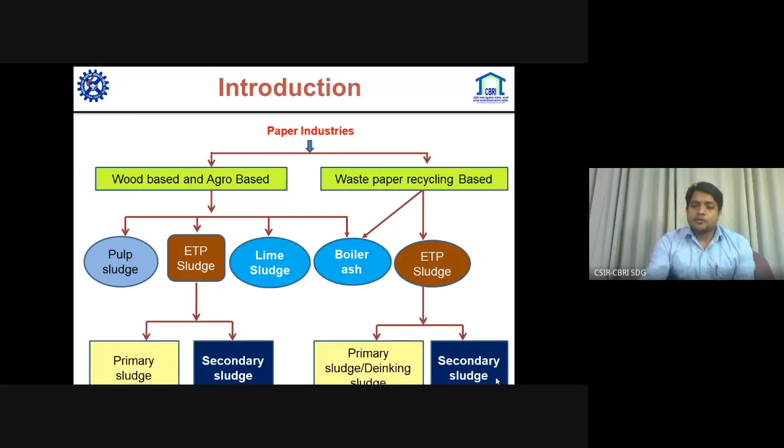Lime sludge generation takes place in wood waste and agro waste paper industries. Basically, in the pulping process, the wood is converted to pulp, and ultimately the pulp is converted to paper. When we use wood or agro waste material in the digester and give it temperature, it will become pulp. And when we wash that pulp, weak black liquor also comes out with the pulp, as depicted in the slide.

Weak black liquor will go to the evaporators. Because weak black liquor is very diluted, the evaporator will convert it into heavy black liquor. This black liquor contains organic lignin, because the pulp must be white, since paper will be white. So the lignin comes out, and this lignin has some calorific value; it is organic, so it is energy.

This heavy black liquor, which has lignin and chemicals used in the digestion process, will come to the recovery boiler. The recovery boiler will consume the lignin and give energy to run the paper plant, and green liquor comes out. This green liquor is nothing but sodium carbonate and sodium sulfide. We can't just waste the chemicals; they are very valuable in the paper industry, in every industry.

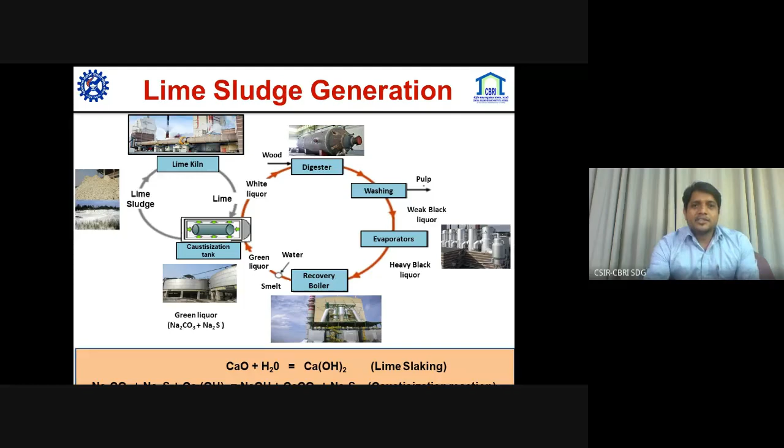So evaporation and heating are okay, but in the calcining process at the third step, this silica causes the scaling problem in the lime kiln. So the process becomes so energy intensive, and hence it's not cost effective to paper industries. So for paper industries it's not worthy to use lime kiln operation at this energy cost.

Another reason is the cheap availability of lime in the market. Lime is very cheap and available in the market, so paper industries are not preferring to regenerate the lime out of lime sludge. They just dump the lime sludge, so it's becoming a problem.

And the third reason associated with lime sludge is the high pressure to reduce CO2 emission, because calcium carbonate will convert to calcium oxide, which will emit CO2, and that is very obvious. Everyone knows the greenhouse effect, and CO2 emissions should be reduced. So there are 3 factors.

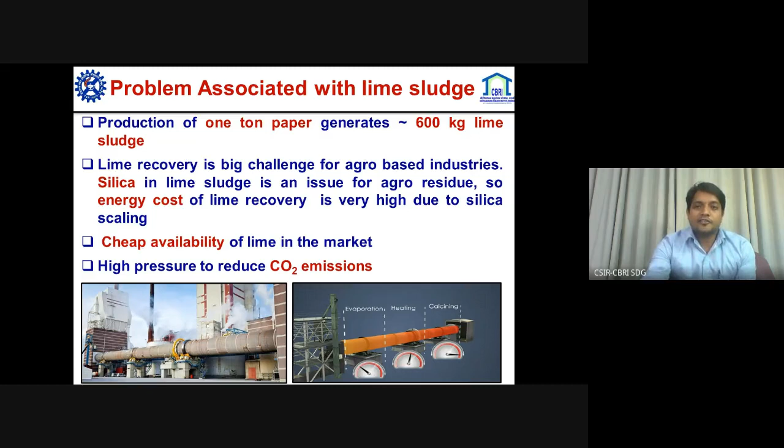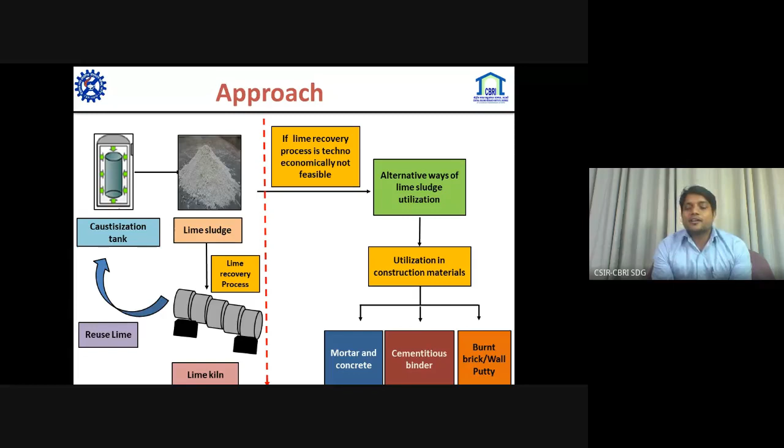What can be our approach for lime sludge utilization in construction? Basically the paper industries were using the lime recovery process, but nowadays the lime recovery process is not techno-economically feasible. So alternative ways for lime sludge utilization should be there. Utilization in construction material can be the option, and we can use the lime sludge in 3 ways: mortar and concrete, cementitious binder, and also burnt brick and some wall putty production.

In this approach, we can use lime sludge in different ways, like blending with other waste materials. We can blend the lime sludge with fly ash and boiler ash because they are sources of alumina and silica. So we can blend this calcium with alumina and silica, which can make a better construction material. Another is calcination, calcium carbonate to calcium oxide, but it is again a very energy intensive process. Third one is we can use it as a filler in concrete.

It is because raw lime sludge is an inactive material. It's calcium carbonate; it will not do anything in the concrete system. So we can use it as a filler. But the utilization of lime sludge as a filler will be very minimal.

We can use the silica of the lime sludge in a fourth way. The silica is present in the form of kaolinite also in lime sludge. So we can convert this kaolinite to metakaolinite, which can function as a pozzolanic material. So there are four approaches.

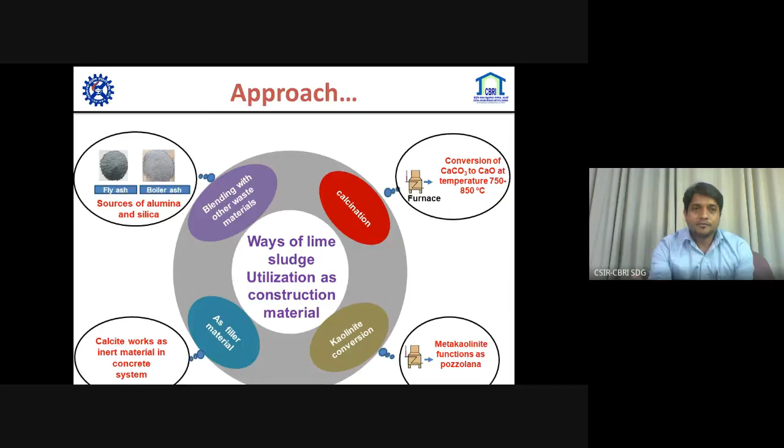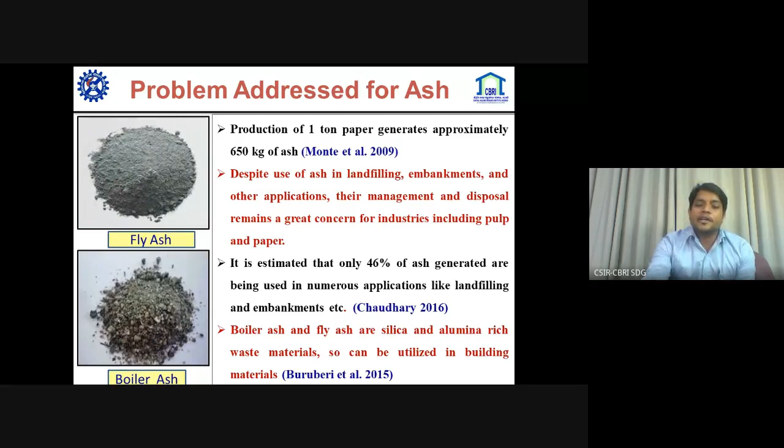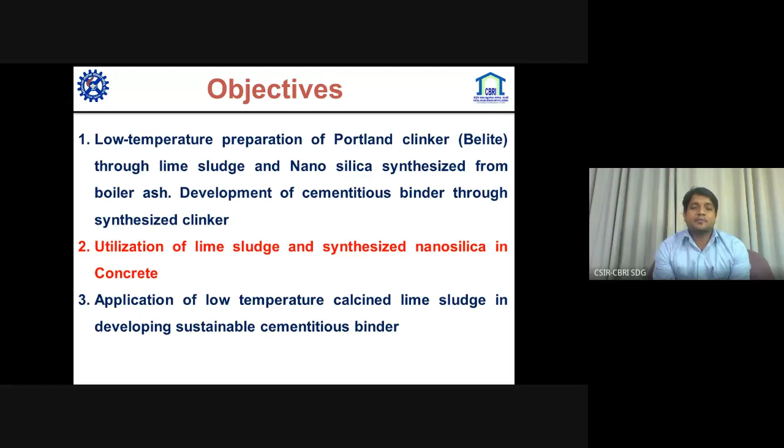The objectives of my work were the low temperature preparation of Portland clinker, basically belite-based clinker, through lime sludge and nanosilica synthesized from boiler ash, and the development of cementitious binder through synthesized clinker. Second one is utilization of lime sludge and synthesized nanosilica in concrete. And third one is application of low temperature calcined lime sludge in developing sustainable cementitious binder.

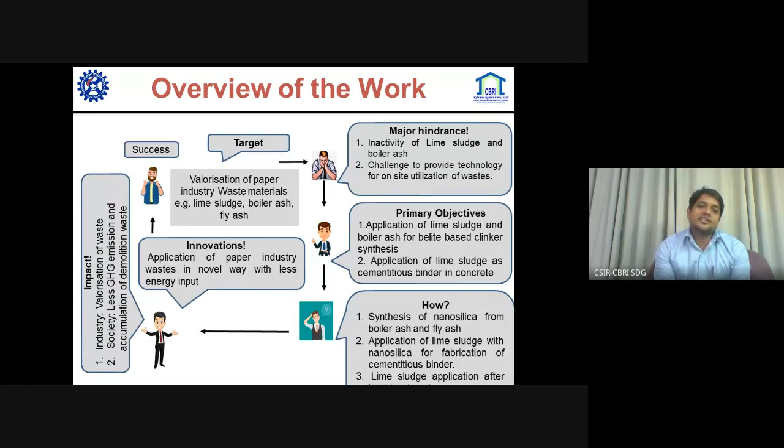The innovation related with this work is the application of paper industry waste in a novel way with less energy input, and it will also impact the industries with the valorization of waste, and society will be impacted with less GHG, greenhouse gas emission, and accumulation of waste.

So the characterization of raw materials: the XRF chemical composition of raw materials was performed, and in lime sludge calcium oxide is present at 45.10%. This is because when it was performed, the LOI is 43.18; carbon dioxide will be emitted, and so the remaining is calcium oxide, 45.10%. If we take them together, it will be around 93 to 94% calcium carbonate.

And in the boiler ash, silica is majorly present with 43.22%, and alumina with 6.18%, and the abundance of alumina and silica makes boiler ash and fly ash good precursors to synthesize nanosilica out of them.

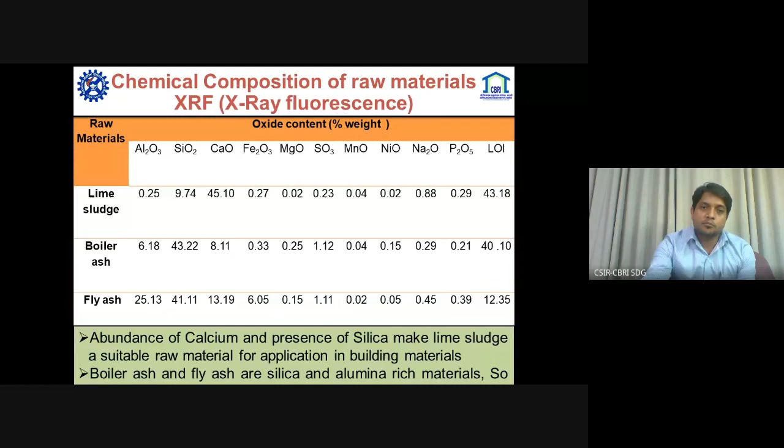On the mineralogical analysis of raw materials, the lime sludge clearly represents calcite, talc, and kaolinite. Fly ash represents quartz and mullite, and boiler ash also quartz and mullite. The fly ash has more mullite than quartz, and the boiler ash has more quartz than mullite. This is due to the greater alumina presence in fly ash in comparison to boiler ash. Boiler ash is more silica prominent, while fly ash has both silica and alumina. So we chose the boiler ash for the nanosilica production. This is the reason.

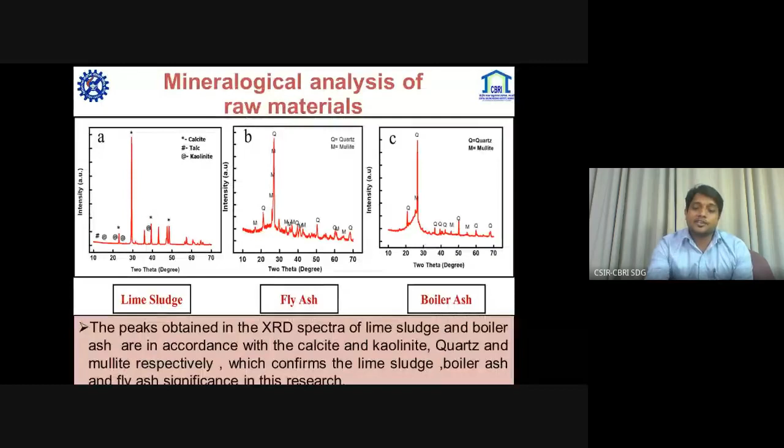So for the lime sludge, at temperature 787 degrees C, the DTA curve is dominated by a strong endothermic peak, which is characteristic of the decomposition reaction of calcite, calcium carbonate to calcium oxide. This is about lime sludge. At 787 degrees C the endothermic peak is there, so this is conversion of calcium carbonate to calcium oxide. It also reflects a mass loss of approximately 40%.

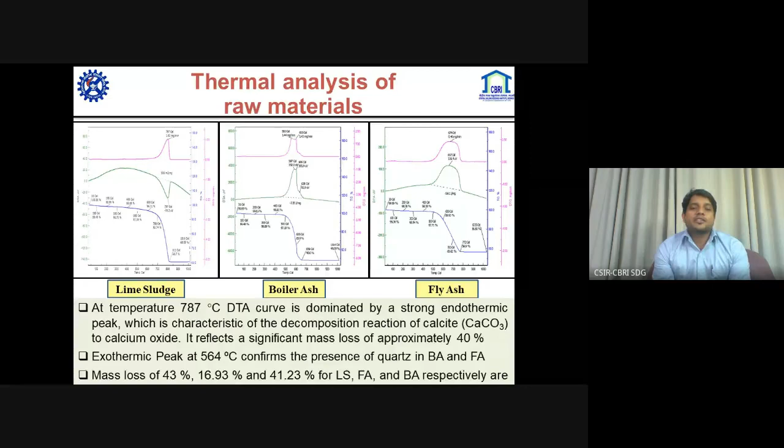The exothermic peak at 564 degrees C confirms the presence of quartz in BA and FA. Mass losses in BA and FA respectively are consistent with the loss on ignition determined in XRF analysis. Synthesis and characterization of nanosilica.

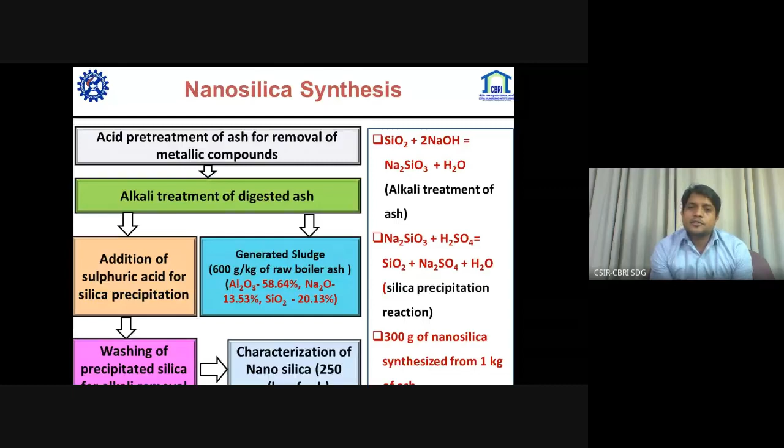Nanosilica synthesis was performed with boiler ash. The acid pretreatment of ash for the removal of metallic compounds was performed. Then the alkali treatment of digested ash was performed, followed by the addition of sulfuric acid for silica precipitation. As you can see in the reactions, SiO2 reacted with sodium hydroxide, converting to sodium silicate and H2O, and this sodium silicate reacts with sulfuric acid, producing silica, sodium sulfate and H2O.

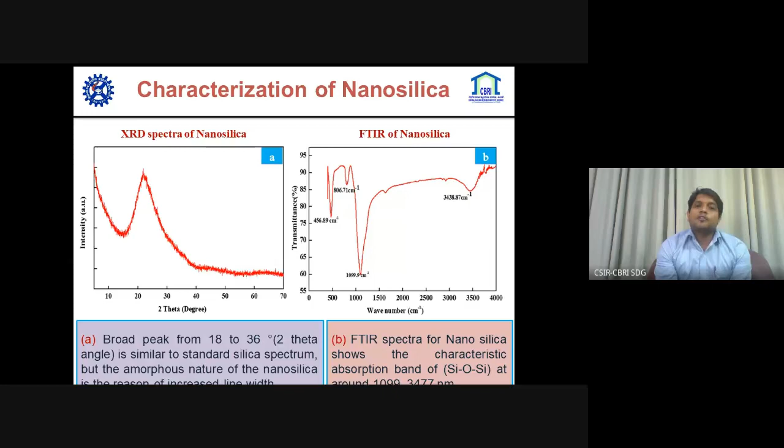In the characterization of this nanosilica, the broad peak in the XRD spectrum from 18 to 36 two theta is similar to the standard silica spectrum, but due to the amorphous nature of the synthesized nanosilica, the width of the peak is increased, as can be seen in the figure. The FTIR spectra of nanosilica show the characteristic absorption bands of Si-O-Si at around 1099 and 3477, which confirm the synthesis of nanosilica from boiler ash.

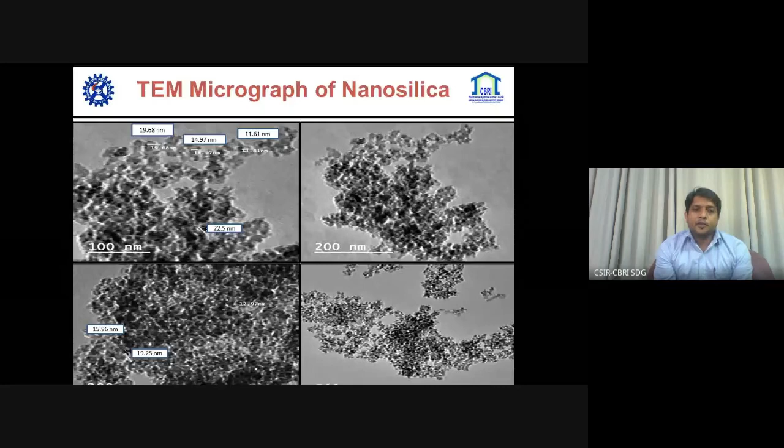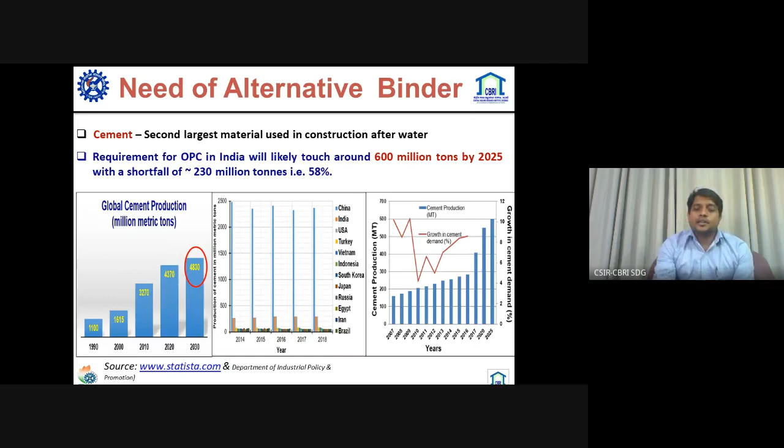Results and discussion: the synthesis of belite-based binder using lime sludge and nanosilica. The synthesized nanosilica was utilized with lime sludge for the synthesis of belite-based binder. Why is there a need for an alternative binder? The requirement of OPC in India will likely touch 600 million tons by 2025, with a shortfall of 230 million tons. It was almost 370 million tons in 2020. So it is required to enhance the OPC production process, or to develop an alternative binder which can help fulfill the needs of the construction sector.

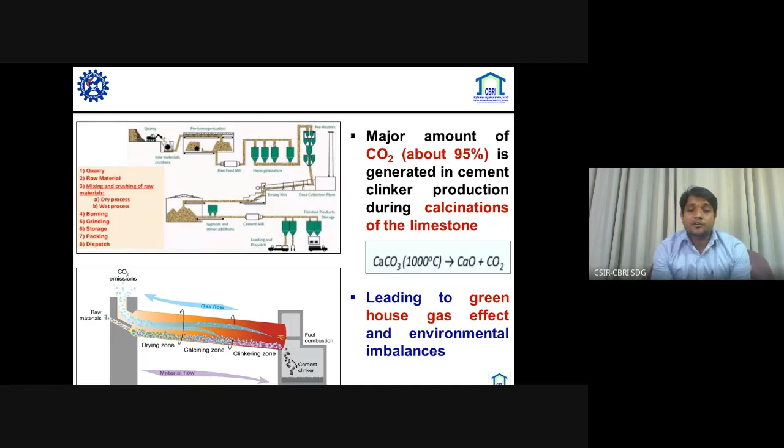But the major amount of CO2, about 95%, is generated in cement clinker production during calcination of limestone, calcium carbonate to calcium oxide, leading to greenhouse gas effect and environmental imbalances.

This binder production will reduce that temperature, and will synthesize the binder clinker at low temperature.

So in this flow chart, it is depicted that lime sludge, boiler ash, and fly ash are used. The boiler ash was used for nanosilica synthesis, and the synthesized nanosilica was further utilized with lime sludge. Boiler ash was also used as a blend with lime sludge, and fly ash was also used with lime sludge.

So when we homogenized the mixture of all three materials with lime sludge and fired them at different temperatures in a muffle furnace, characterization of the mixture for Belite synthesis was performed. From this clinker, the binder was fabricated with the addition of GGBS and tested for different properties.

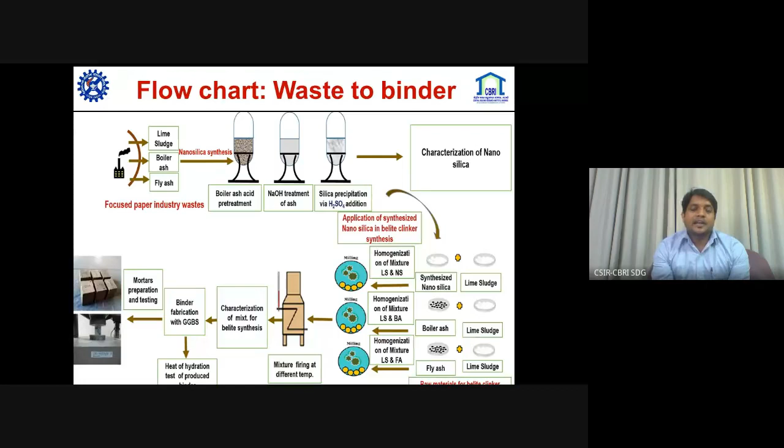As depicted in the flow chart, there were three blends: lime sludge plus nanosilica, lime sludge plus boiler ash, lime sludge plus fly ash. Basically the Belite is synthesized through the calcium oxide and silicon oxide reaction.

Keeping the molar ratio of calcium and silica up to 2, on the basis of stoichiometry, these blends were formed, in which nanosilica was 34 grams, boiler ash was taken up to 78 grams, and fly ash 85 grams.

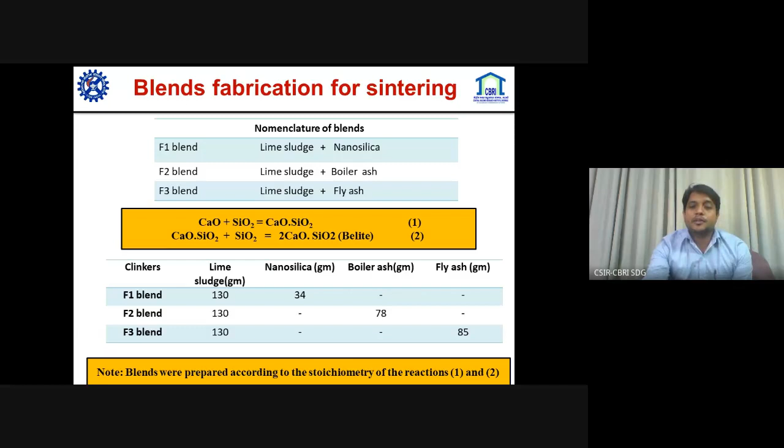Regarding the retention period and heating profile of the blends, pellets were formed with the homogenized blends and sintered in a muffle furnace. Blends were sintered at different temperatures from 900 to 1200 degrees C. A retention time of 2 hours was optimized for all the blends, and natural cooling was applied for all sintered blends.

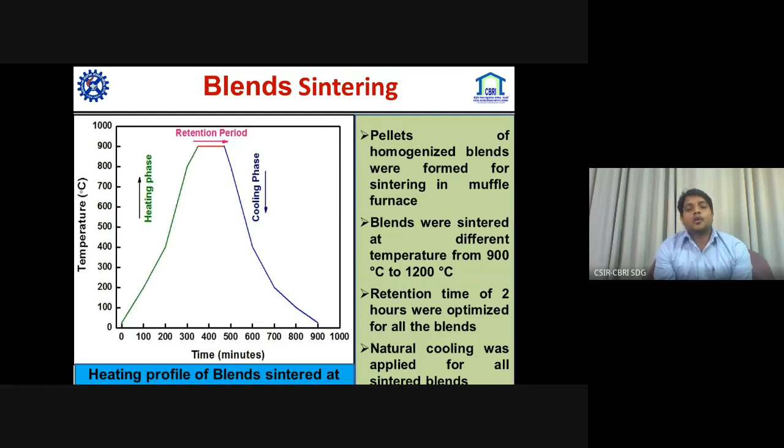After that, the characterization of sintered blends was performed with XRD analysis, hydration test, and compressive strength test.

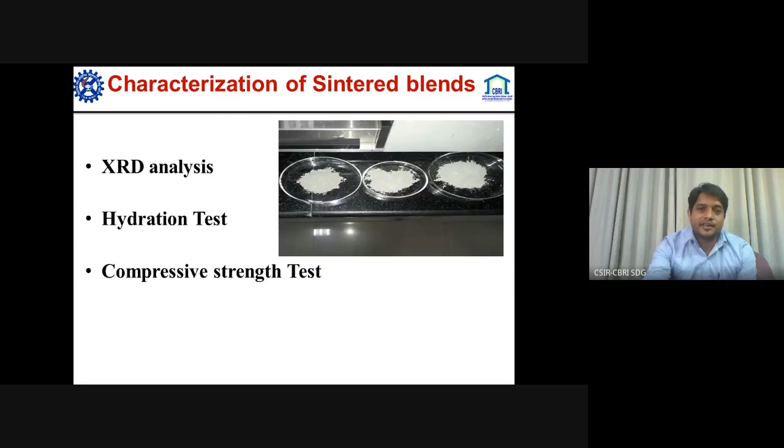In the XRD analysis of the F1 blend, it was observed that at 900 degrees C the Belite was prominent, but at the very high temperature of 1200 degrees C it was converted to wollastonite in the F1 blend case. So at 900 degrees C we can get Belite.

In the case of F2 blend and F3 blend, there was synthesis of gehlenite and anorthite taking place, and this is due to the presence of alumina in boiler ash and fly ash.

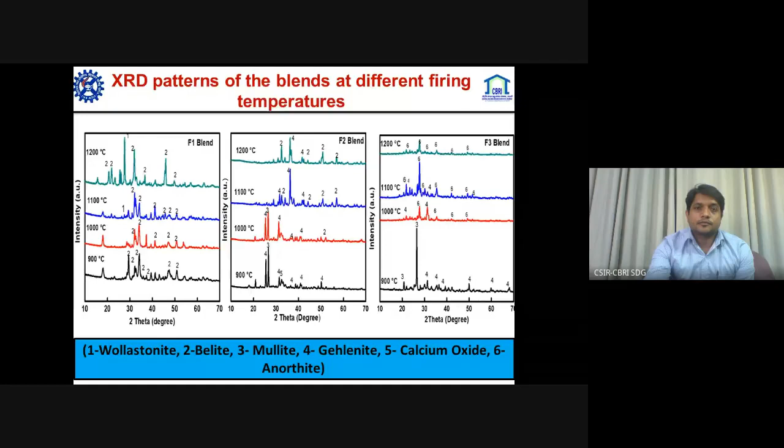So from the synthesized clinker, the binder was prepared. The blend characterized with Belite synthesis, which was the F1 fired blend with nanosilica and lime sludge, was further used for binder preparation. 80% of Belite based clinker and 20% of GGBS were used for fabrication of the cementitious binder.

The fired powder was milled and sieved, then mixed with 20% of powdered ground granulated blast furnace slag (GGBS), which has silica and alumina with calcium in its composition.

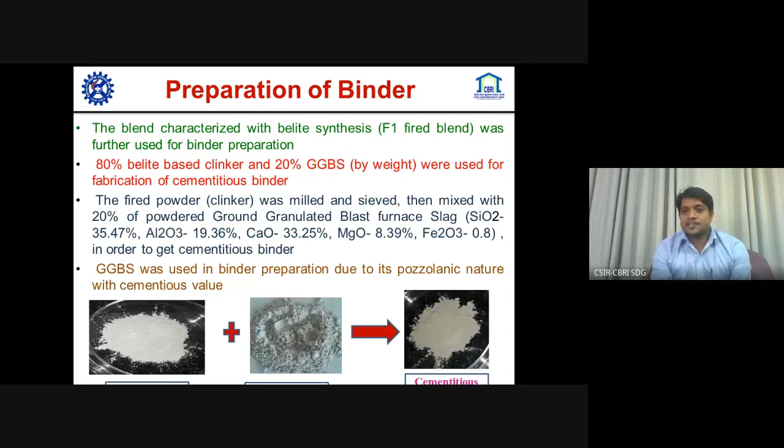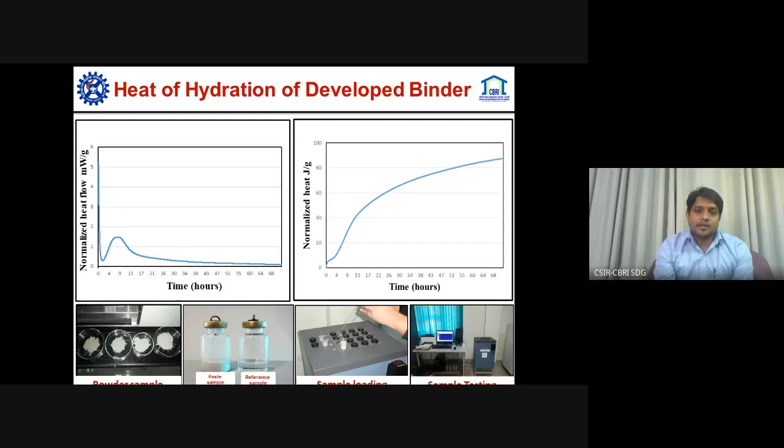So GGBS was used in the binder due to its pozzolanic nature, which provides the cementitious property to the binder. On the heat of hydration analysis of this developed binder, it was clear that it can be compared to OPC cement.

The compressive strength and density of the prepared binder showed that compressive strength was 5 Newton per millimeter square, 12 Newton per millimeter square, and 15 Newton per millimeter square at 7, 28, and 56 days of curing respectively. The mortar met the strength requirement at 28 days for masonry mortar according to Indian Standard 2250.

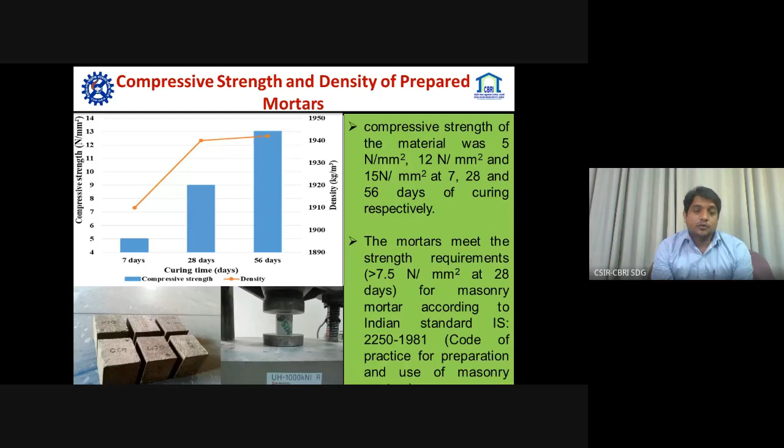The estimated cost for production of 1 kg of nanosilica was around 29 rupees per kg, on the basis of chemicals required and ash required.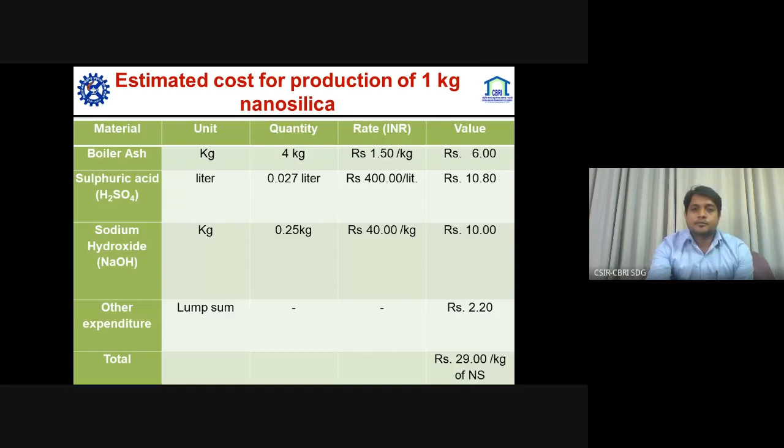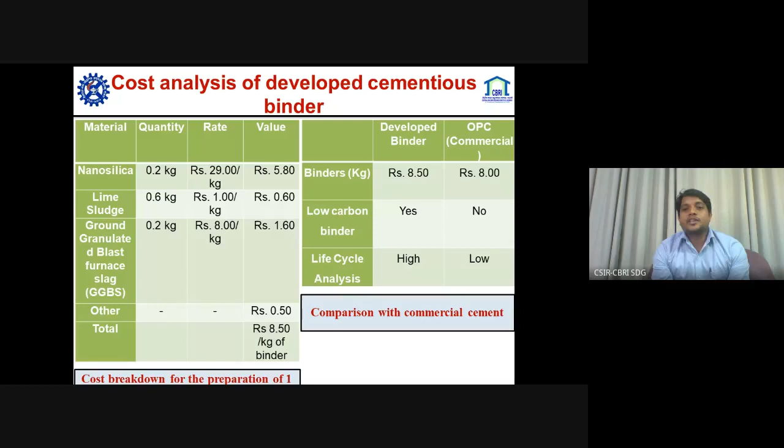When we do cost analysis of the developed cementitious binder, it was very much comparable with commercial OPC, as it is 8.50 per kg of binder, which is very much comparable to commercial OPC. The cost of the developed binder can be further decreased with bulk manufacturing or with better technology and better instrumentation for this developed process.

So this was the binder fabrication, and now I'm taking up the utilization of lime sludge and synthesized nanosilica in concrete directly.

Nanosilica has a very high specific surface area, so it is highly reactive and can contribute to the high strength development of the concrete.

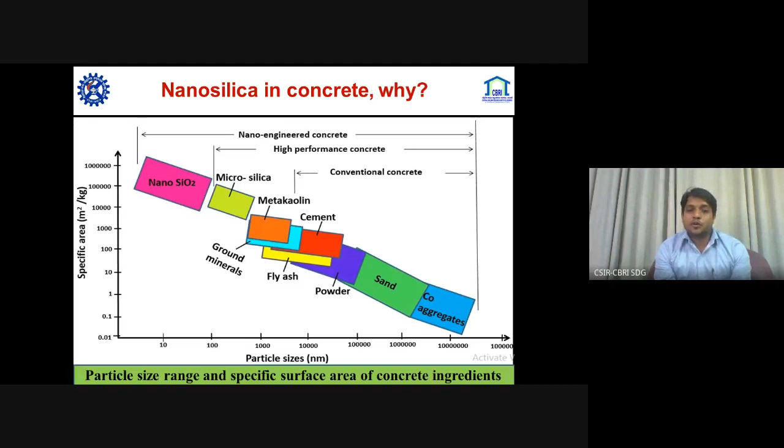But why is lime sludge with nanosilica required? When we use as-received lime sludge, we can only use up to 10% replacement of OPC, according to the literature. When we calcine the lime sludge at 850 degrees C, up to 30 to 40% replacement of OPC is possible, but calcination is again energy intensive.

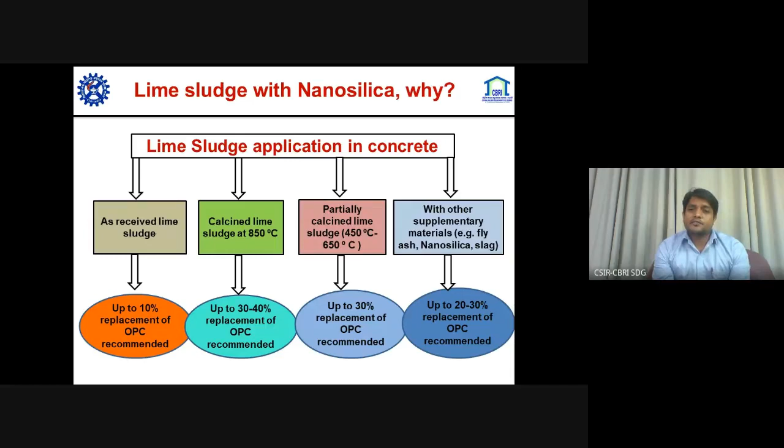The third point: when we partially calcine lime sludge at 450 to 650 degrees C, we can further use up to 30% replacement of OPC. And when we use lime sludge with nanosilica or other supplementary pozzolanic materials, it can replace up to 30% of OPC.

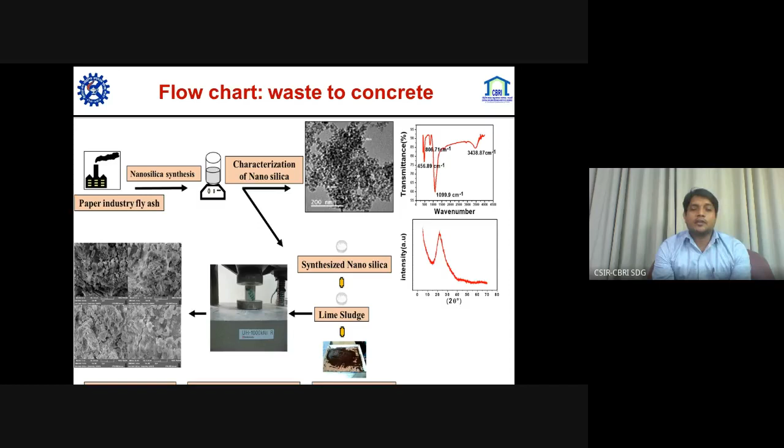So here is the flow chart of waste to concrete. The nanosilica was synthesized from the ash, and this ash with synthesized nanosilica and lime sludge was utilized for the production of concrete, and all testing was done. The flow chart for concrete production includes raw material and mixing, filling of concrete mix in molds in 3 layers, finishing using trowels, demolding, curing, and then compressive strength testing.

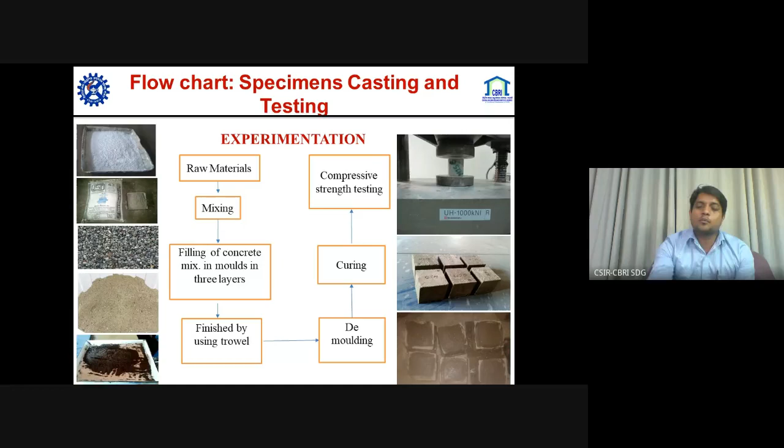The compressive strength of concrete with different doses of lime sludge and nanosilica shows that lime sludge application with nanosilica can increase lime sludge consumption up to 30% without affecting the compressive strength of the concrete. Application of nanosilica produces better results due to the chemical effect of nanosilica.

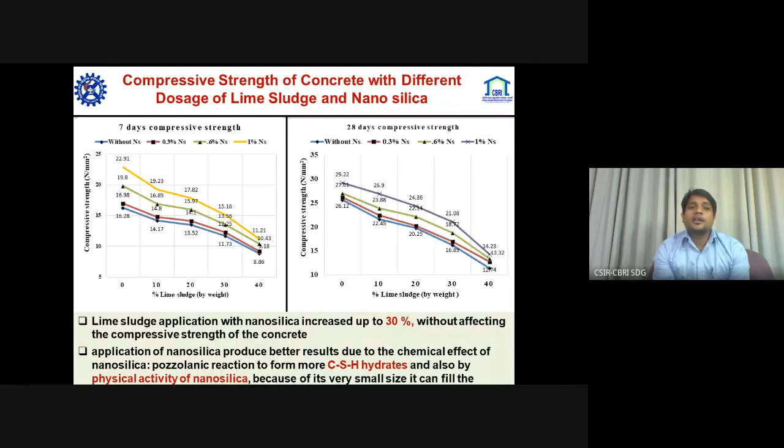It is because of both chemical and physical effects of nanosilica. Physically, it fills the voids in the concrete, and chemically it is highly reactive, so it reacts to develop more CSH gel. As an outcome, concrete having 1% nanosilica develops more strength than other concrete blends.

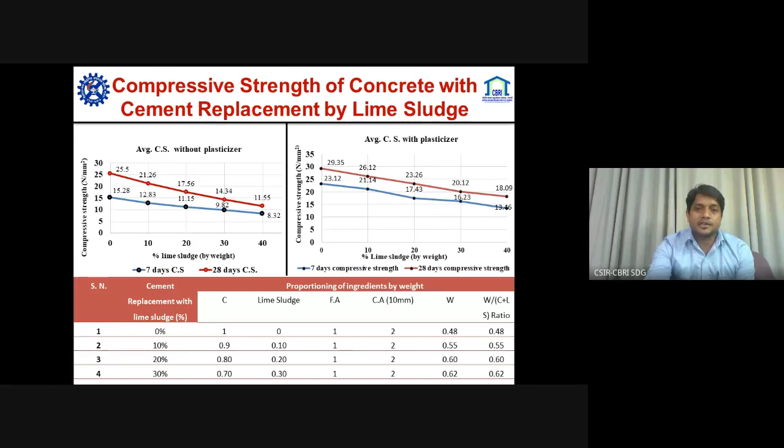We also performed experiments using plasticizer to compare the effect of nanosilica with the plasticizer impact. We can see that up to 20% replacement with lime sludge is possible using plasticizer, but it was 30% replacement of OPC with lime sludge combined with nanosilica.

We also did this with fine aggregate replacement, and it was seen that with plasticizer we could replace fine aggregates with lime sludge up to 20%, but with nanosilica it was increased up to almost 30%. So when replacing fine aggregate with lime sludge, we can use plasticizer, but when replacing cement with lime sludge, we have to use a highly reactive pozzolanic material, which can be nanosilica.

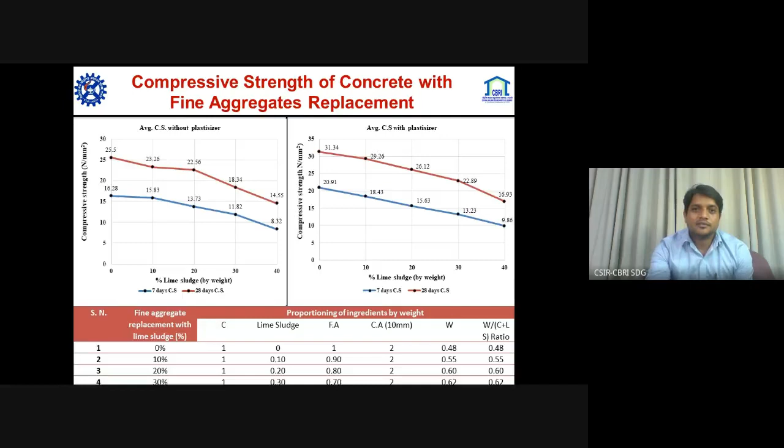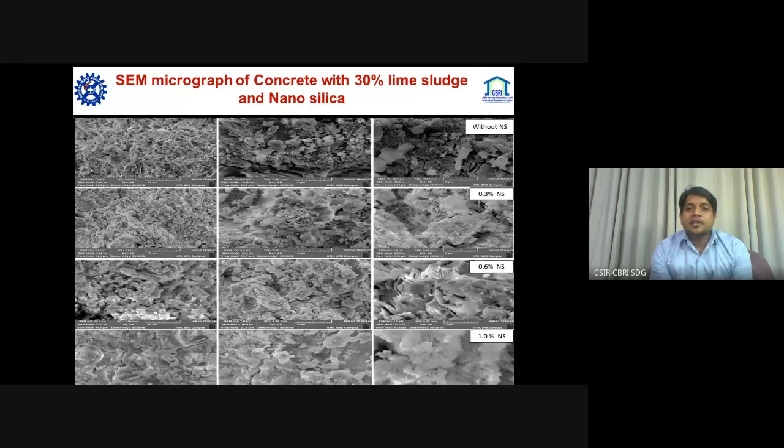When using nanosilica up to 1%, it can be seen that the SEM micrographs are improving in compactness and uniformity with the increasing percentage of nanosilica.

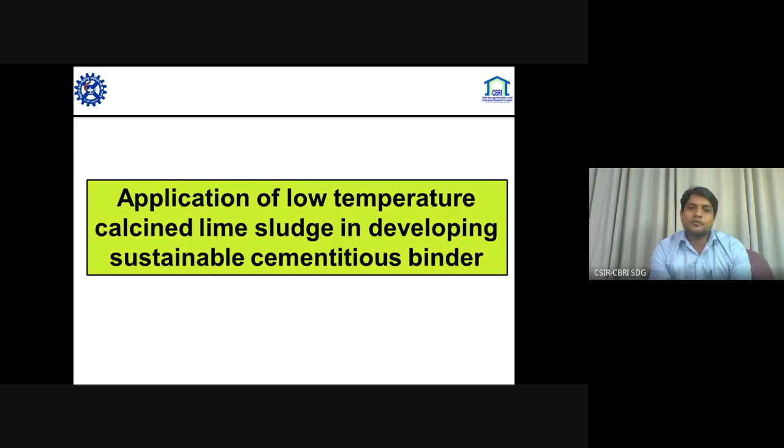Taking the third objective: application of low temperature calcined lime sludge in developing sustainable cementitious binder. Why is low temperature calcination of lime sludge required? Because at temperatures of 450 to 700 degrees C, kaolinite is converted to metakaolinite.

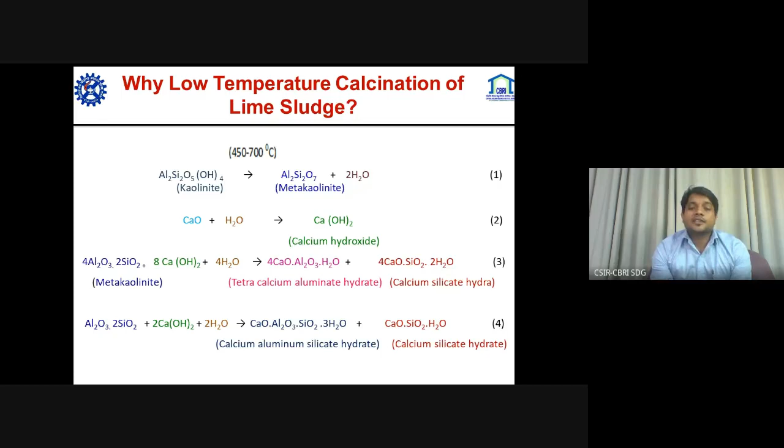Kaolinite is present in lime sludge up to 5 to 10%, and when converted to metakaolinite, it becomes a pozzolanic material. This pozzolanic material reacts with calcium hydroxide to form tetracalcium aluminate hydrate and calcium silicate hydrate, which is CSH gel, further developing more CSH gel, which enhances the compressive strength of the concrete.

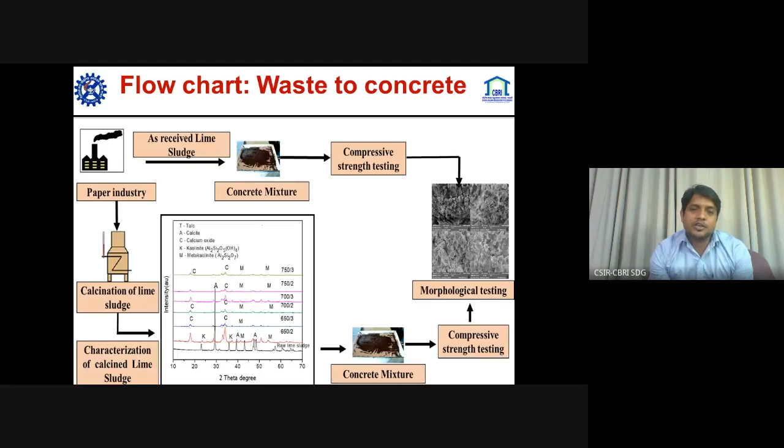Again, the flow chart for the low temperature treatment of lime sludge and its utilization in concrete: calcination of lime sludge was performed, and mineralogical analysis was performed. Then it was put in concrete, and other properties were tested. The same was also done with as-received lime sludge, used in concrete, testing compressive strength and other properties.

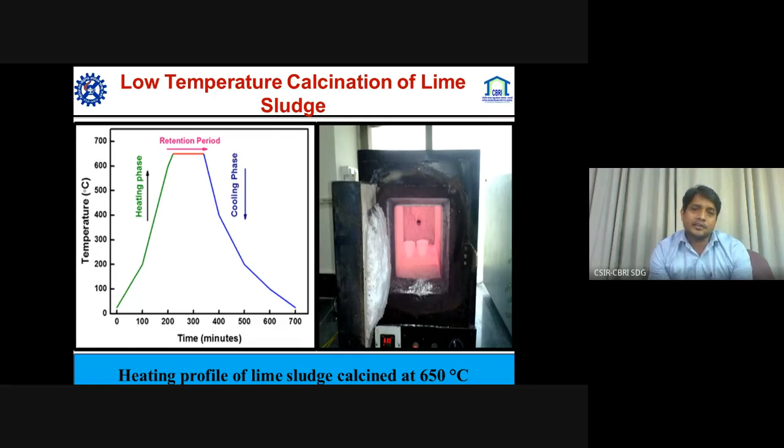The heating profile was 650 degrees C, kept for 2 hours. When we see the raw lime sludge, kaolinite was present, but after the heating treatment at 650 degrees C for 2 hours, it was further converted to metakaolinite.

The other XRD spectra are for higher temperatures, but they produced the same result, so we optimized it at 650 degrees C.

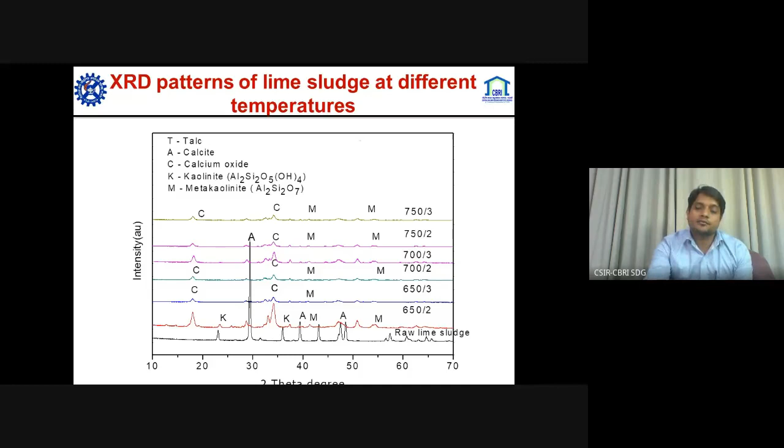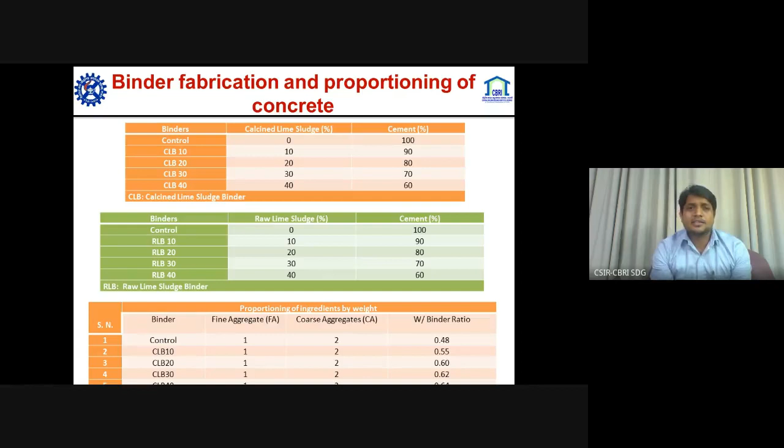So we prepared blends with calcined lime sludge and raw lime sludge with cement replacement, and named them calcined lime sludge based binder and raw lime sludge based binder. We replaced from 10 to 40% of cement with this.

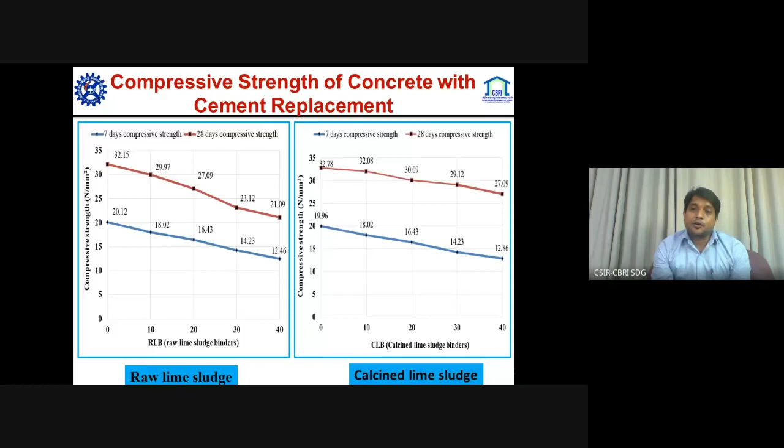With raw lime sludge, it was seen that up to 30% replacement, the compressive strength decreased drastically, but with calcined lime sludge, it is possible to use lime sludge up to 30% of cement replacement.

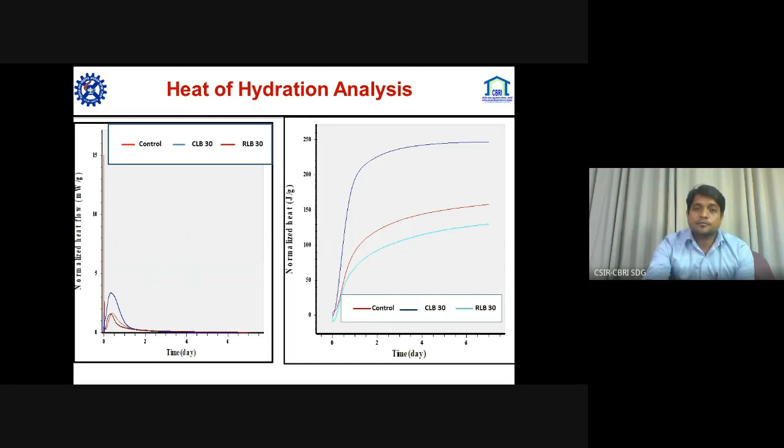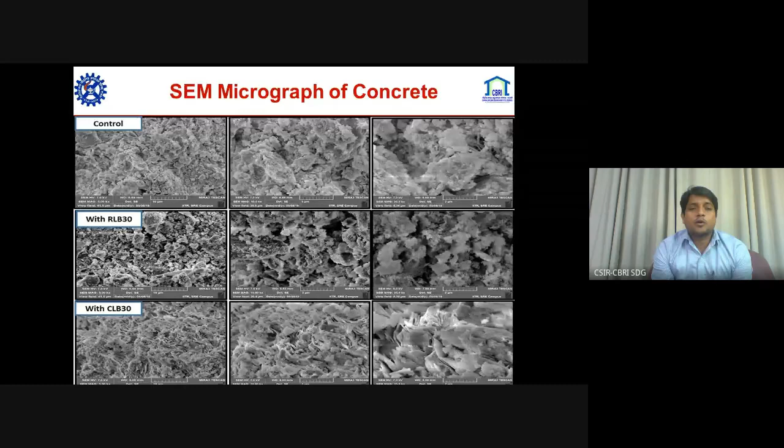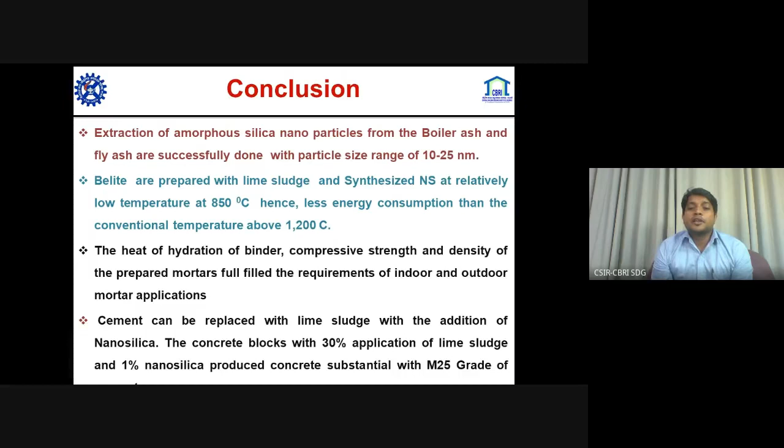The heat of hydration of binder, compressive strength and density of the prepared mortars fulfill the requirements of indoor and outdoor mortar application. Cement can be replaced with lime sludge with the addition of nanosilica, and concrete blocks with 30% application of lime sludge and 1% nanosilica can produce the same result in M25 grade of concrete.

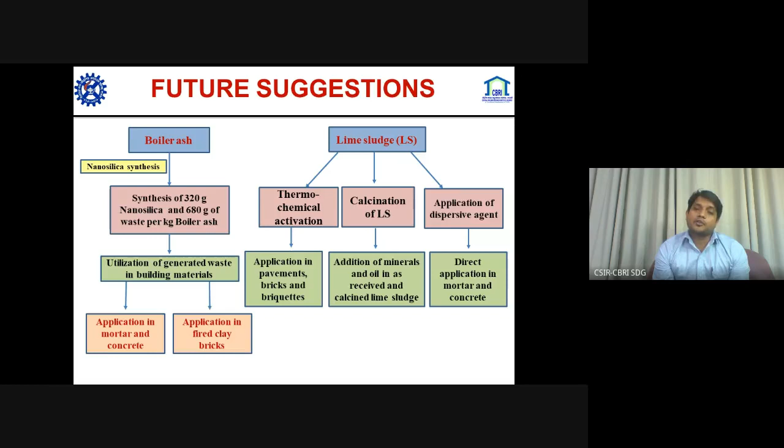For lime sludge, there are possibilities of thermochemical activation, calcination of lime sludge, and application of dispersive agents. Thermochemically activated lime sludge can be directly used for pavements, bricks and briquette production, while calcined lime sludge can be used with other minerals, along with as-received lime sludge. Application of dispersive agents allows direct use in mortar and concrete.

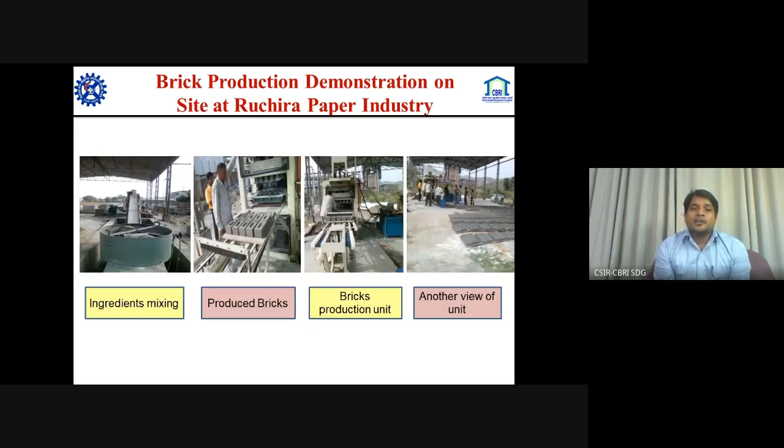This is the big brick production unit in our partner industry, Ruchira Paper Industry, Kala Amb, Himachal Pradesh. They set up a plant to produce lime sludge based bricks, and we are soon in the process of transferring the technology to them.

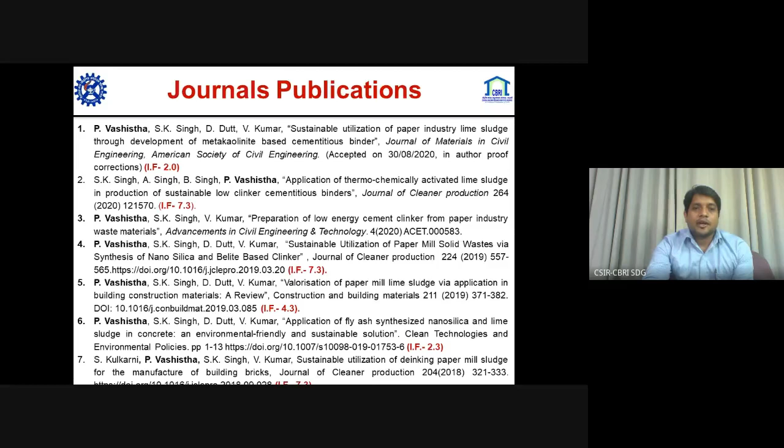These are the journal publications. Some of my research I have published on waste utilization for the paper industry. Thank you so much.